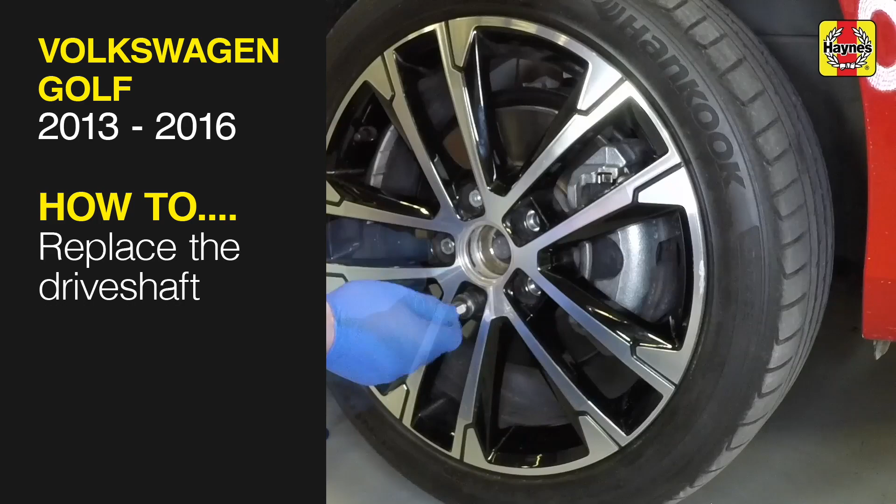Drive shafts renewal.

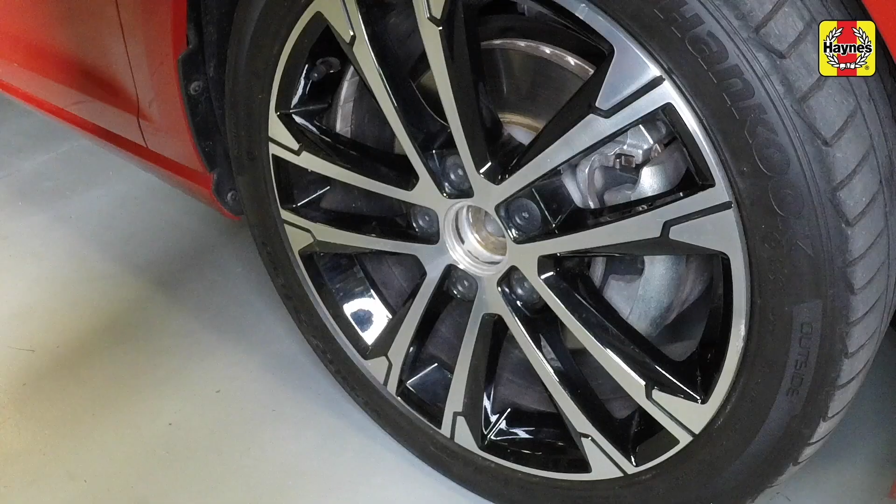Remove the wheel trim centre cap, then apply the handbrake and partially unscrew the relevant hub bolt with the vehicle resting on its wheels by a maximum of 90 degrees. Note that the bolt is very tight and a suitable extension bar will probably be required to aid unscrewing.

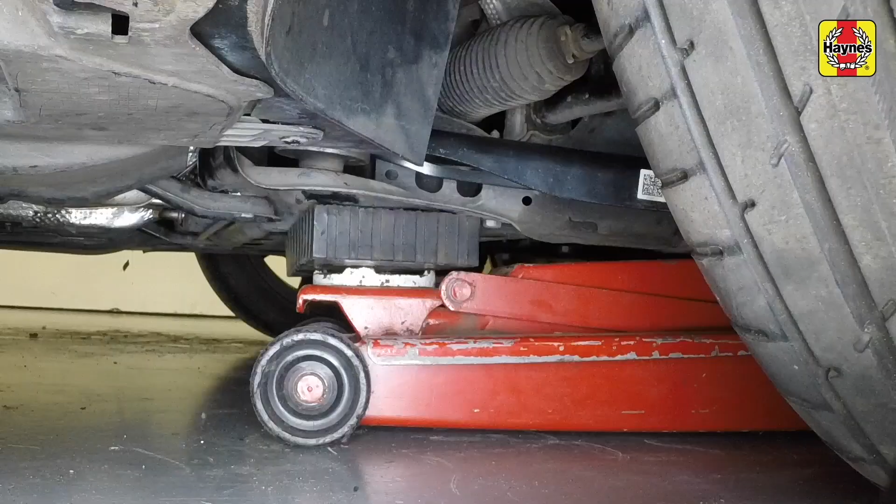Now remove the caps from the front wheel bolts. Using the locking wheel nut adapter supplied with the vehicle where necessary, slacken each of the wheel bolts half a turn. Position the jack under the front subframe rear mounting and raise the vehicle.

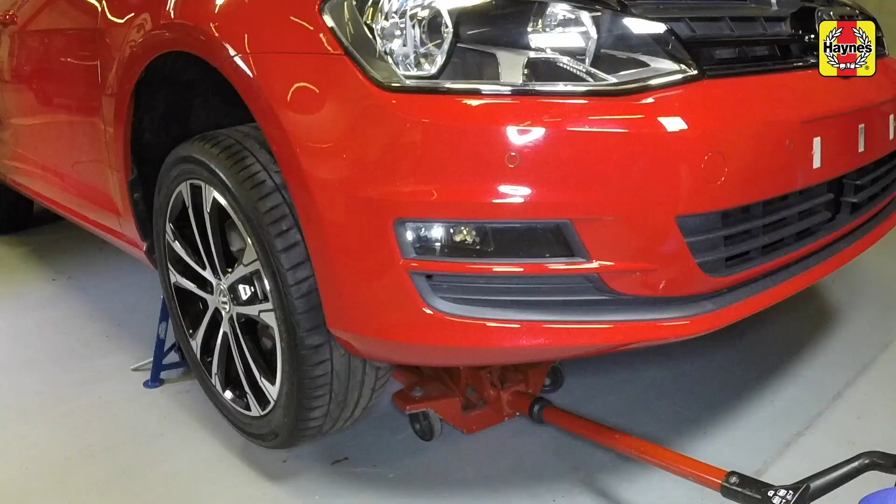Now place axle stands in position, then lower the vehicle onto the axle stands and remove the jack. Undo the wheel bolts and remove the relevant front wheel.

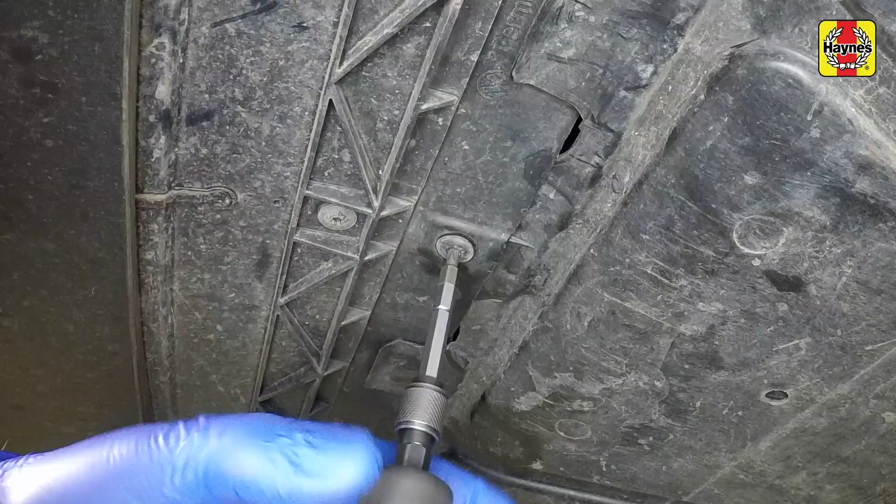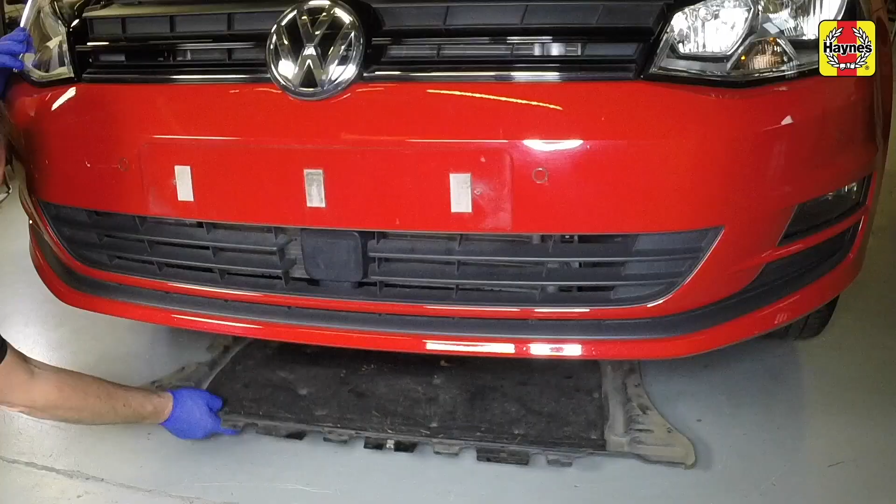Remove the screws at the front, near side edge, off side edge, and rear of the engine under tray. Release the clips at the front, then lower the under tray, and remove it from underneath the vehicle.

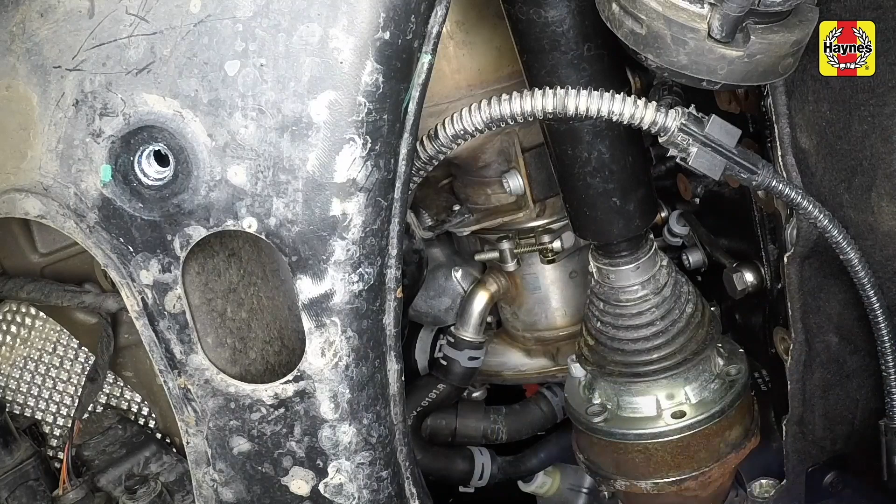Fully unscrew and remove the hub bolt. Discard the bolt and obtain a new one.

Unscrew the nut securing the front suspension lower arm ball joint to the lower arm. Discard the nuts because new ones must be used on refitting.

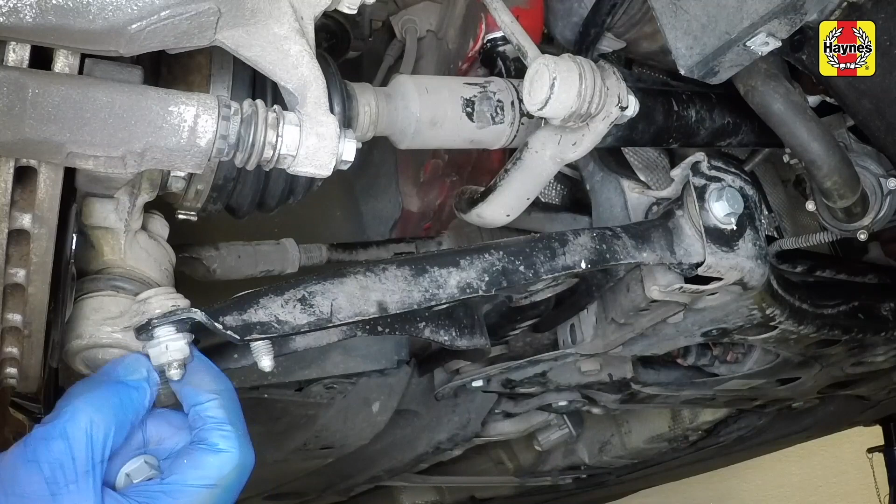Disconnect the anti-roll bar drop link from the anti-roll bar and, on models with xenon headlights, unbolt the ride height sensor from the control arm.

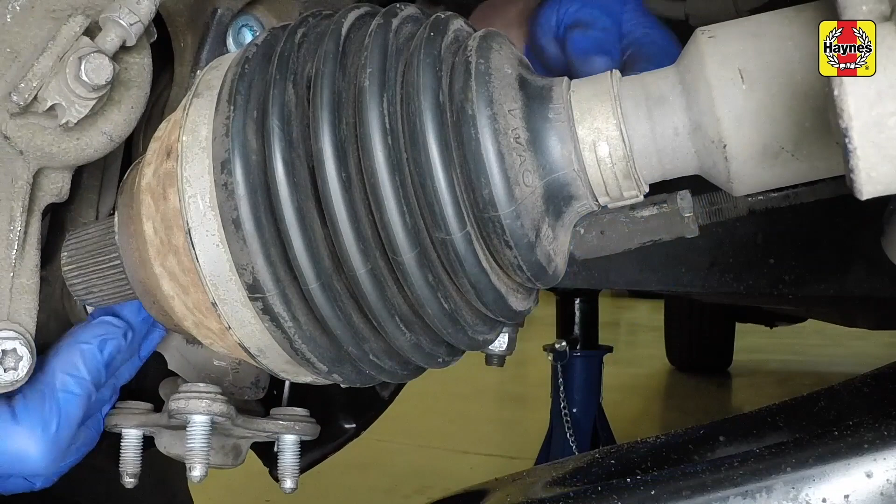Lever the lower arm downwards to release it from the ball joint studs, then pull the hub carrier outwards and at the same time withdraw the drive shaft outer constant velocity joint from the hub.

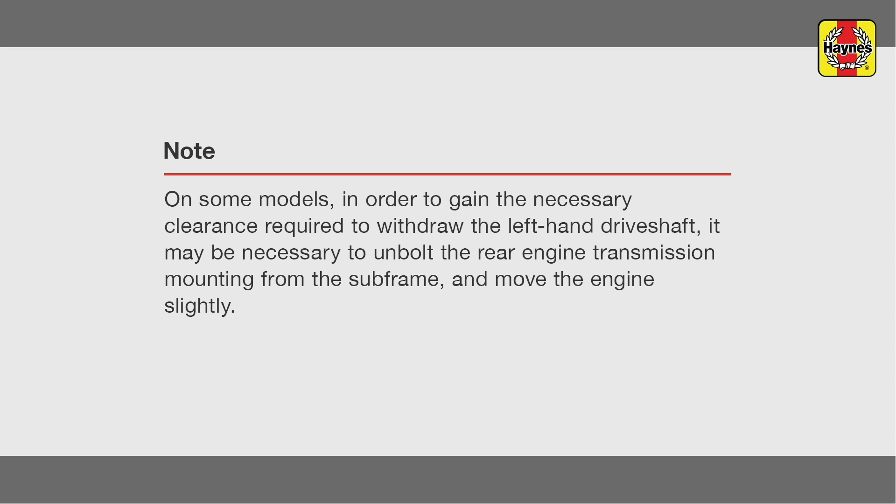Maneuver the drive shaft out from underneath the vehicle and, where fitted, recover the gasket from the end of the inner constant velocity joint. Discard the gasket and obtain a new one.

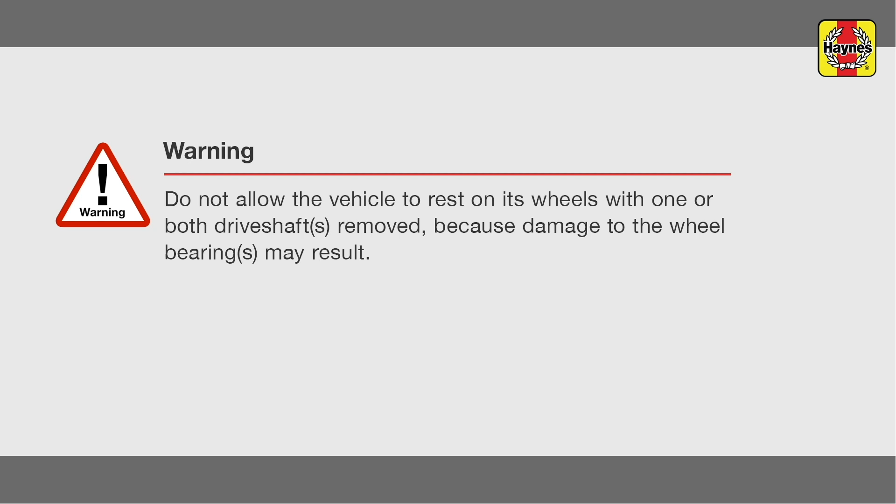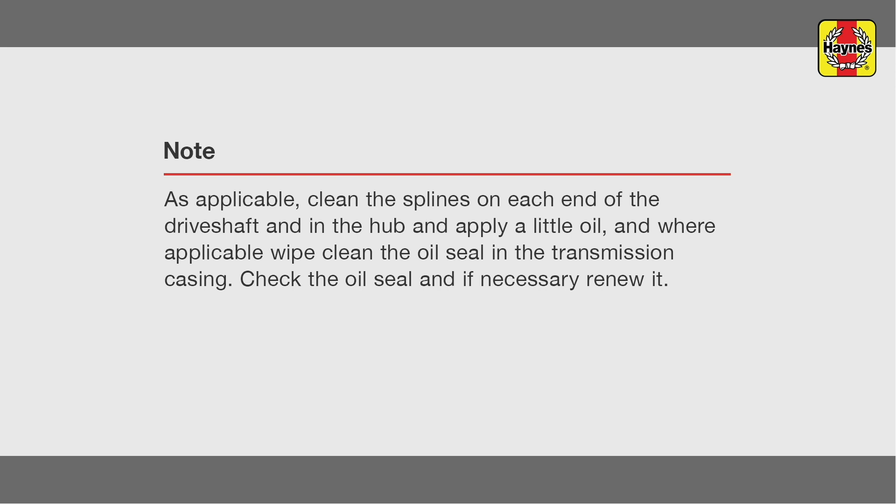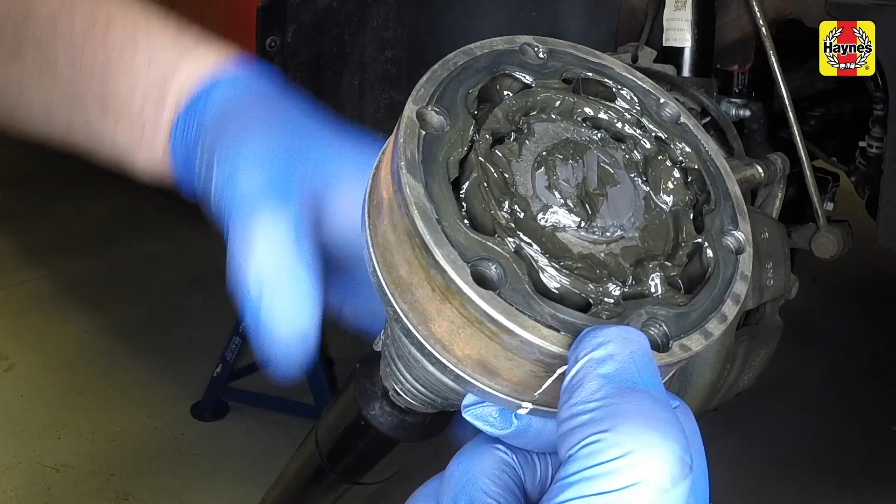Ensure that the transmission flange and inner joint mating surfaces are clean and dry. Where necessary, fit a new gasket to the joint by peeling off its backing foil and sticking it in position.

Maneuver the drive shaft into position, aligning the previously made marks, and then align the inner joint holes with those on the transmission flange. Refit the new retaining bolts and locking plates, and then tighten the bolts to the specified torque.

With the lower arm levered downwards, engage the outer joint with the hub. Fit the new hub bolt and lightly tighten it to draw the joint fully into position.

Align the ball joint studs with the holes in the lower arm, then release the arm and fit the new nuts. Tighten the nuts to the specified torque.

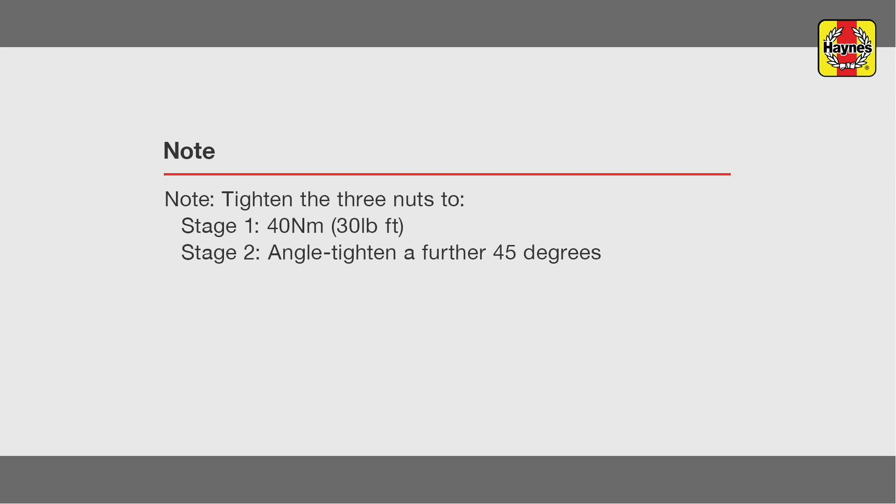Refit the heat shield if removed earlier. Refit the wheel and lightly tighten the retaining bolts.

With an assistant depressing the brake pedal, tighten the hub bolt to the specified torque. Mark the nut before angle tightening it.

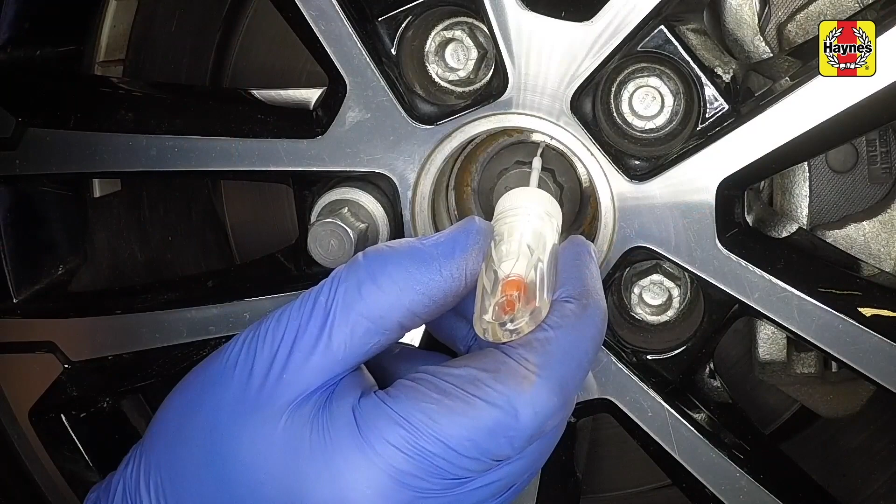Refit the wheel centre cap. Position the engine under tray underneath the vehicle. Engage the tray at the front edge, then install the rear screws, offside screws, near side screws and front screw.

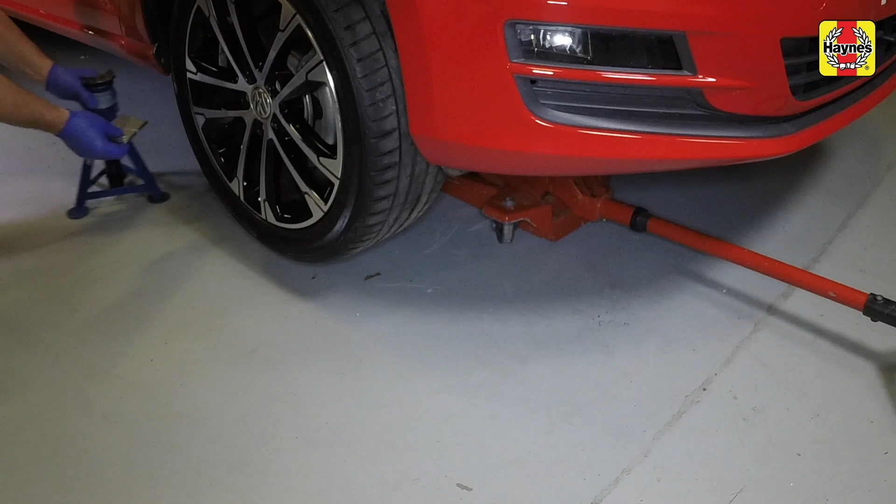Position the jack, raise the vehicle and remove the axle stands. Lower the vehicle to the ground and remove the jack.